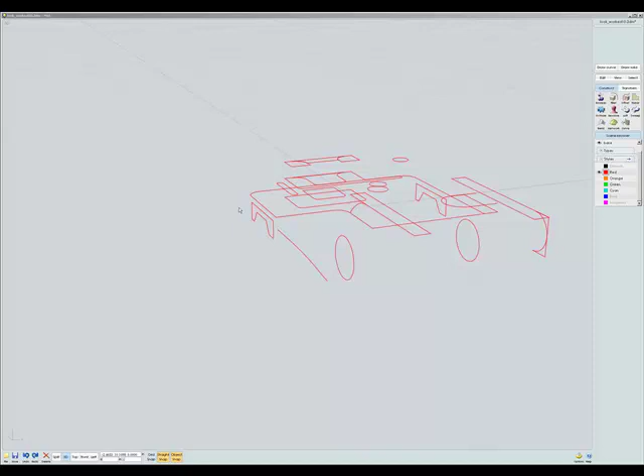Here's some modeling going on. The curves have already been set up, so we're going to do some stuff like an extrude. We're going to be using styles, which is kind of like a layers system inside of MoI.

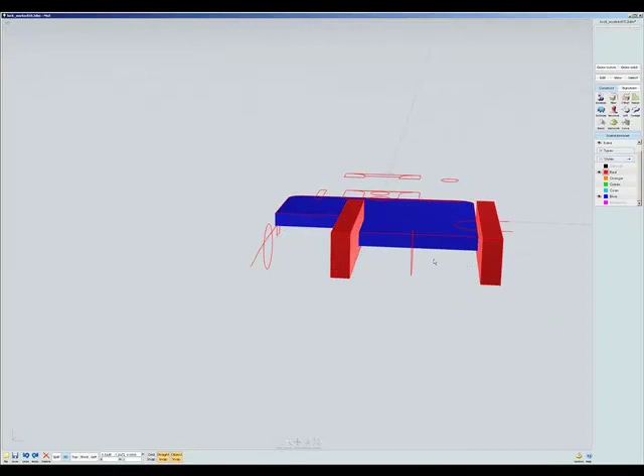To keep things separate. There's an extrude, here's another extrude, so you get the snap points there.

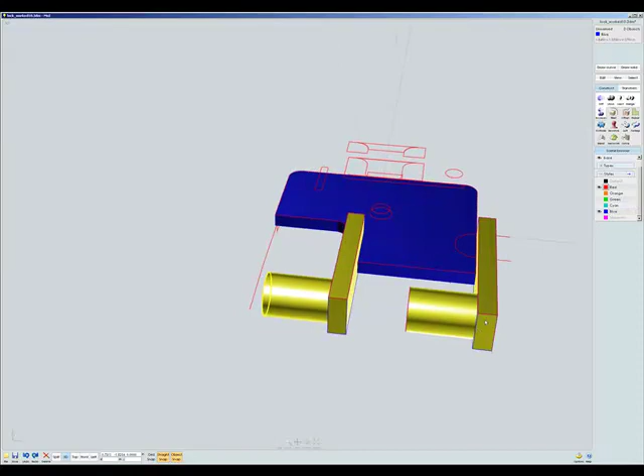Let's Boolean union that stuff together real quick and get it together. Let's see, two solids, make those blue. Boolean union that. There's some issues here with making sure I do this in the right order for fillets to work later on, so I just cut that.

Notice MoI does Booleans with just 2D curves also, so I cut that out with just that curve right there. That's pretty cool.

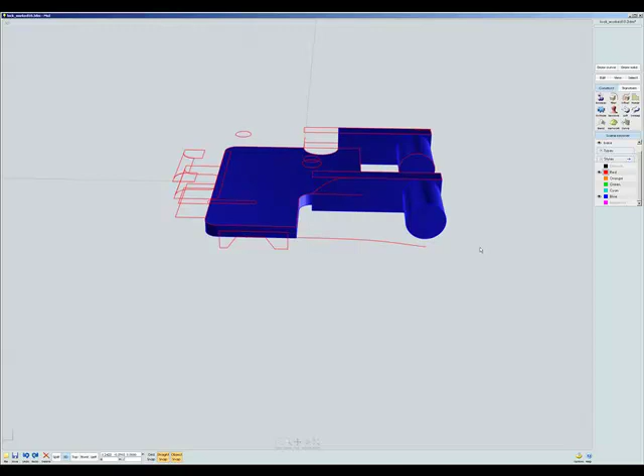Let's cut this stuff off right here. I think we can. Well, first what we want to do is, I think we're ready to fillet there. Let me hide the curves here. I think I can fillet that there.

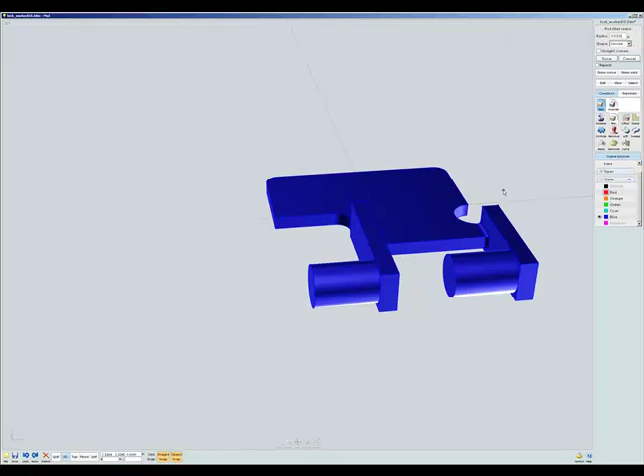0.15, go way up there. Yeah, that's good. Okay, and then I can fillet that top one right there by the amount, which is just that little amount that was left there. That should work. Let's get my curves back.

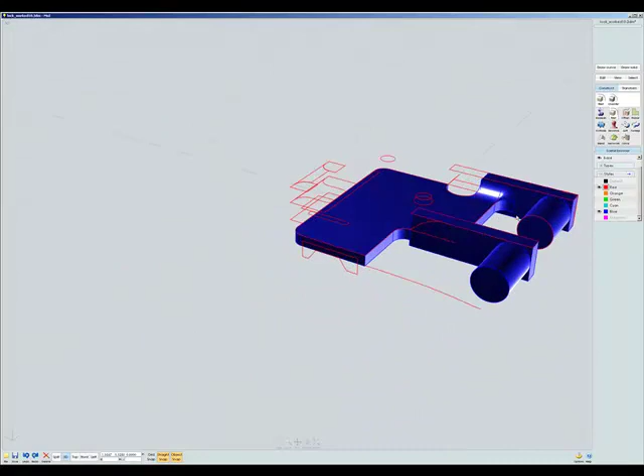I can do some cutting here. I think I'm going to do this from the left side. So again, Boolean should be, there's a Boolean diff with that curve there. I should be able to just do it with single curves, right? There we go.

Let's get back into 3D, make sure we got our thing set up. So let's extrude that across, and we're going to use that as a cutting object. So I extruded it as a surface.

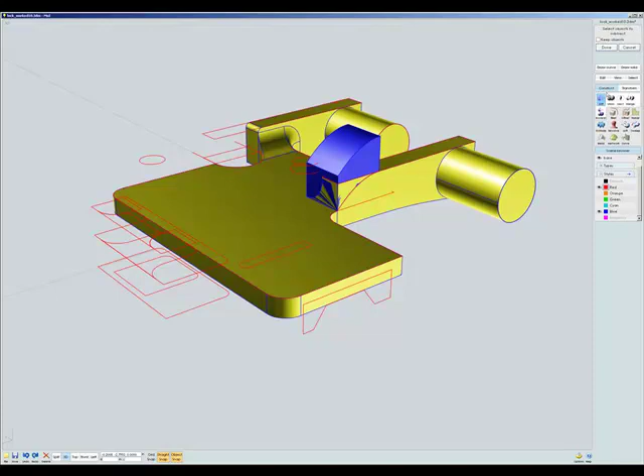Now I'm just extruding it up to get a solid, and make sure I have the same thing. Let's Boolean diff that away from the other one. That'll give me my curve right there.

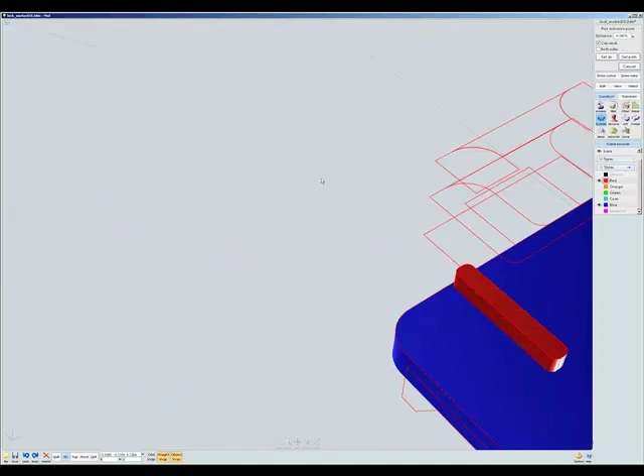Now I think I'm good to just start doing some quick extruding to get these parts in line. If you'll note, the extrude works across, so I'm just getting the halfway point down through the middle of this just to make sure I'm punched into it pretty good. This one, I only need to go halfway into the middle of this one here, so right there is good enough for me.

And then I think those are going to be good for Booleaning into the rest of the model at this point. Boolean union, and if that part of the model is done, I think then I can Boolean union that in. That'll give me a nice seam edge right there. There we go.

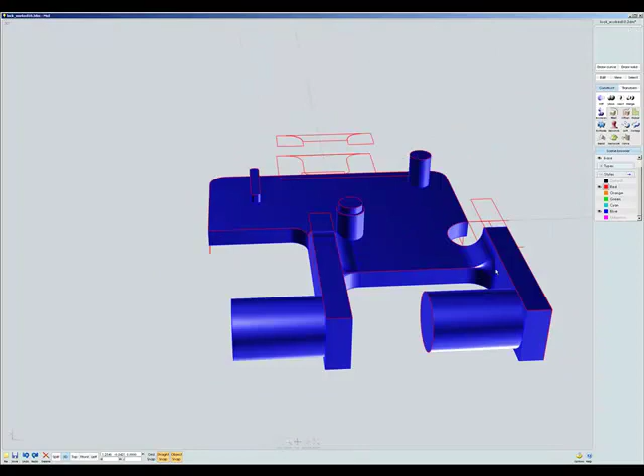Good seams, okay, and oh, forgot to do that one right there. Let's do a Boolean diff. We want to round those corners off, I think, so we'll Boolean diff with that curve that I created right there previously.

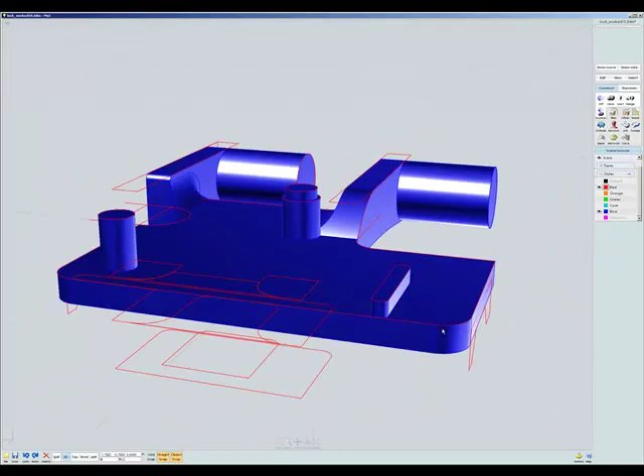There we go. And now let's set up this backside over here. So a couple extrusions again, we'll extrude, that was my bottom plate. This is going to be a cutout, and I already have the height set up for that. So that's what's making it so quick, is I had already pre-set up the curves.

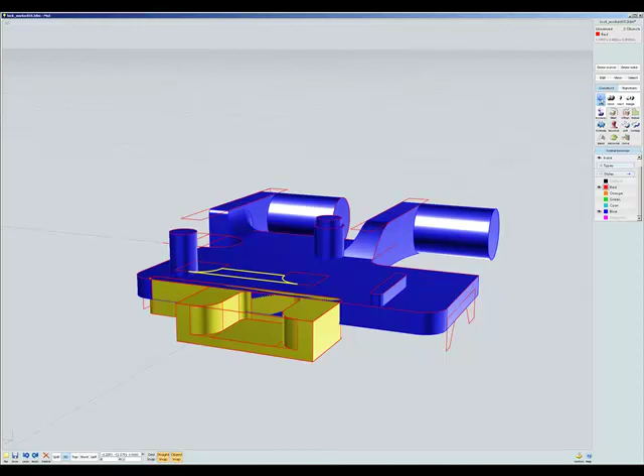Yeah, it's pretty quick to set up curves inside of MoI also. I just didn't feel like I wanted to show that part for this point of putting this model together. I'm tired.

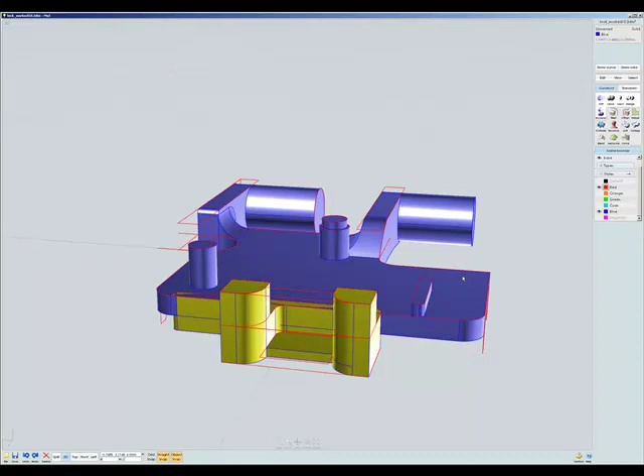Let's Boolean union all this stuff together. Let's get the colors going here. Boolean union. And that part's done, and then now we'll just do a quick loft.

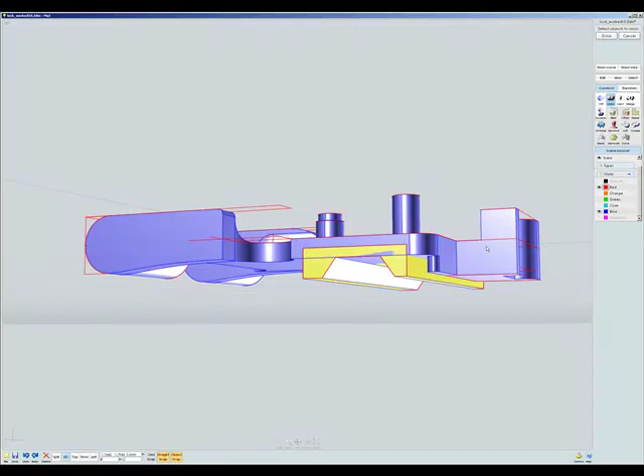I think we're just about done here. Let's loft that. Did I hit it? There we go. And hide the construction curves. I think that's it. There it is.

So that's modeling in MoI. It's really fun to do. I mean, all those snap points, you know, it has...

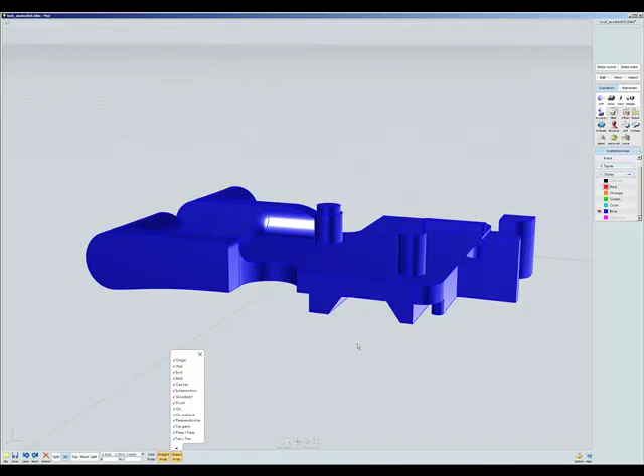These are all the object snaps that are available that you can turn off and on, you know, points and centers and perpendicular and tangents and perps and mids and ends, and those all correspond to the edges showing, you know, this is all the stuff you wish you had in BobCad.

So if I take a curve and I wanted the mid of that line, the mid of that point is there, how about the center is right there? You see what I mean? So coming in the top view, the center of any of these circles is just available to you right there, all the quads.

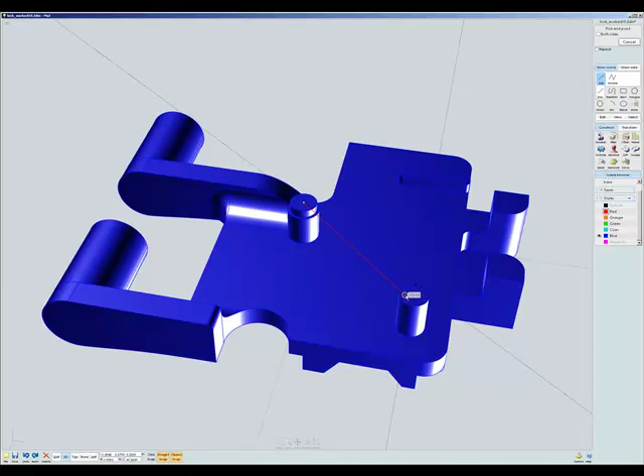So you can, and then construction lines also are really cool. You know, you can just do that, and then you can just do an angle from there to there to there. So anyway, that's pretty cool, yeah. All right.

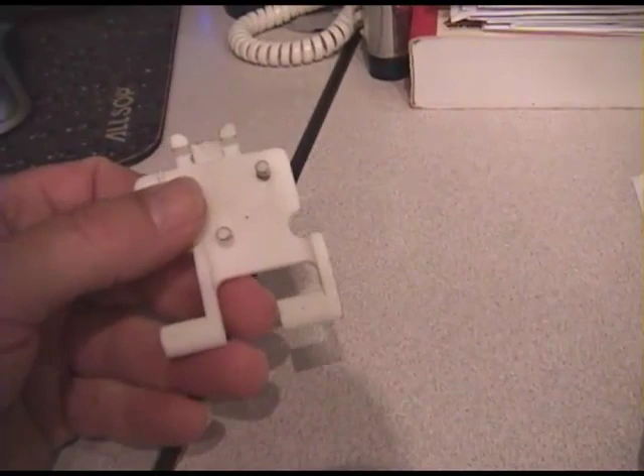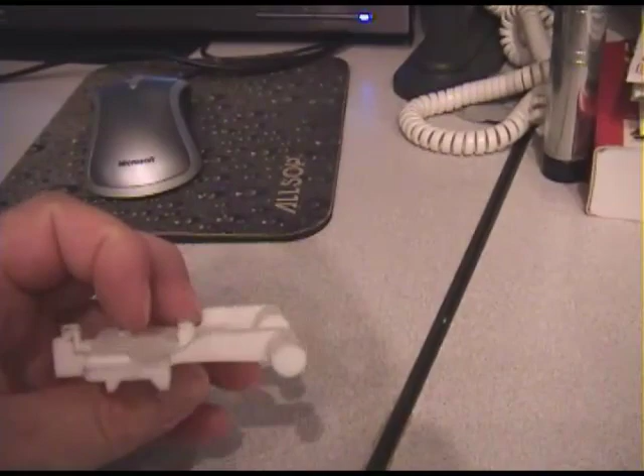And then so the easiest thing to do, a little cheaper, we're going to be cutting this in some expensive brass. So to get approval and final on the part and job for the customer, the easiest thing to do is just send it off to a 3D printing service and get a 3D print.

You can see some grease all over it at this point. It fits right into the lock mechanism and functions. So we give it off to them, we get approval, and then now we go off to cut it on the machine.

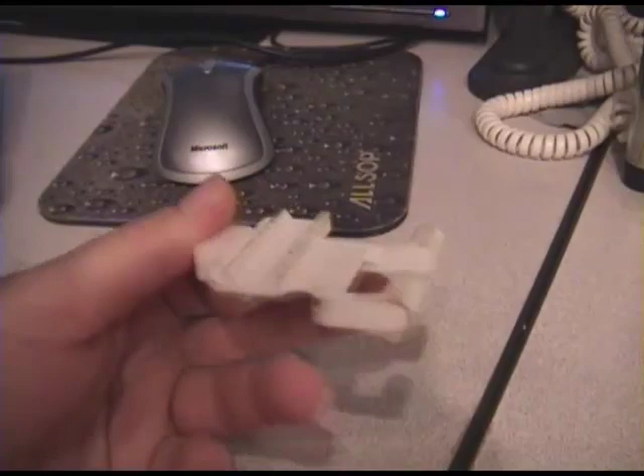So talk to my brother, maybe I'll go over to his place and get some footage of the cut actually happening and how we did it. Yeah, check it out, 3D printing.